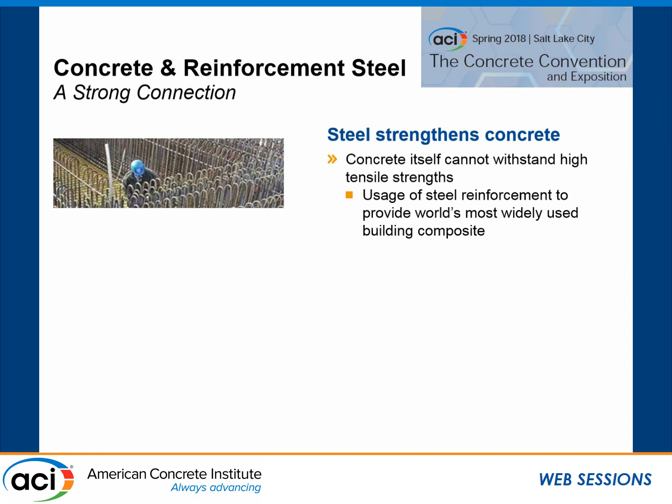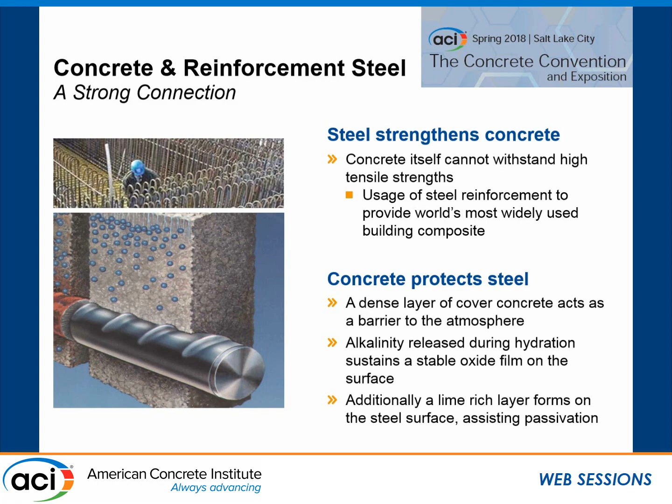Concrete and reinforcement steel have a strong connection. It's a nice synergy. Steel strengthens concrete. Concrete's weak in tension, steel's strong in tension. And in turn, concrete protects the steel. The high pH of concrete creates a passivating layer around steel. Everybody's happy.

Until bad things start to happen. Unfortunately, all steel reinforced concrete is at risk. Steel is just thermodynamically unstable. It is going to rust at some point. You can't change that. You can do a lot of things to prevent it, and the real trick to being successful is to keep it from rusting until you retire.

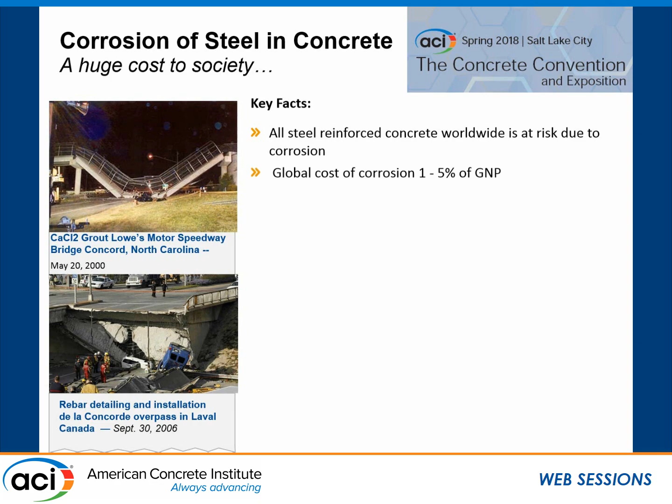Cost is about 1 to 5% of corrosion - that's all types of corrosion, is 1 to 5% of the gross national product of a country. A lot of money. Just of corrosion mitigation in steel, it's estimated to be $1.25 billion.

As long as we reinforce concrete, it's going to rust. You're installing a time bomb. You may be able to do some things to keep it from happening, like impressed current cathodic protection, but eventually the power is going to go off. So natural laws: concrete cracks, steel corrodes.

It's an electrochemical process. The passivation layer, due to the high pH, is actually a corrosion product of the steel. It forms very rapidly. It's just insoluble. And until halide ions - chlorides, bromides, iodides - reach a certain level, that says here 330 parts per million, it's a moving target. It depends on a lot of things.

If pH value falls much below about 10, corrosion will start. It also depends on the oxygen, the temperature, the resistivity of the concrete. What happens? Steel expands when it oxidizes about 4 to 10 times, more or less, the volume. It's in a low tensile strength medium of concrete. That expansion causes cracks. Once concrete cracks, all the properties get compromised in a hurry.

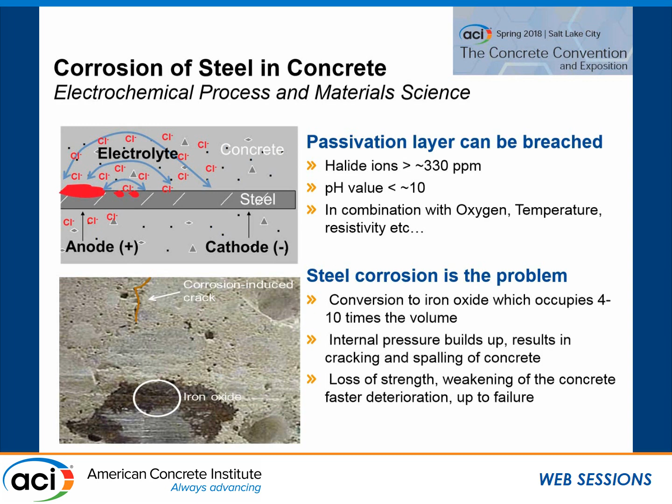Why does corrosion occur? Well, we start out with iron ore. We pump a whole bunch of energy into it in a refining process to turn it into steel. And then Mother Nature wants to turn it back into iron ore through deterioration.

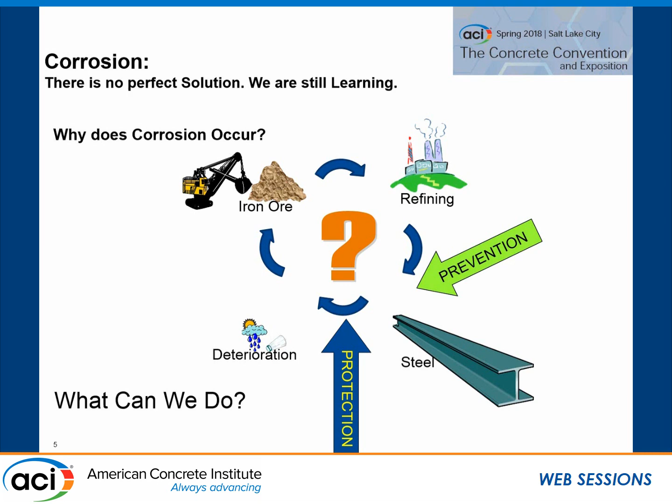So what can we do about it? We can prevent it, change the nature of the steel, replace it with an alternative reinforcement. We can provide protection, creating a barrier between the hostile environment and the steel itself. Or we can try to mitigate corrosion.

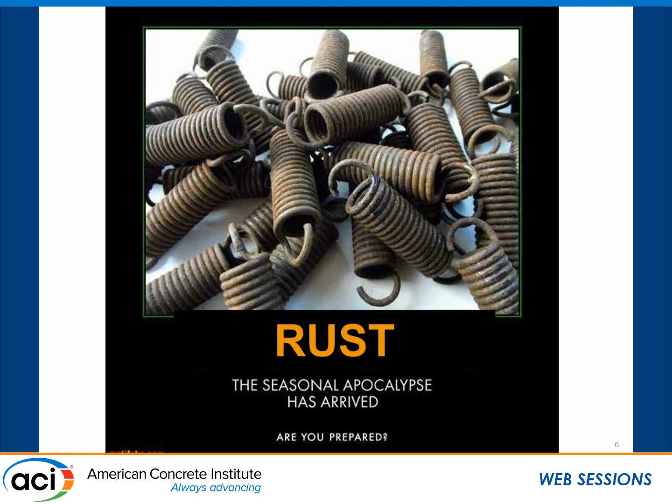However, rust is going to happen, and the seasonal apocalypse is upon us. Spring, we have de-icing salts, we have warming temperatures, we have lots of water. Corrosion management combines 3 really neat things: the economy, the environment, and social responsibility. It is a key component of sustainability.

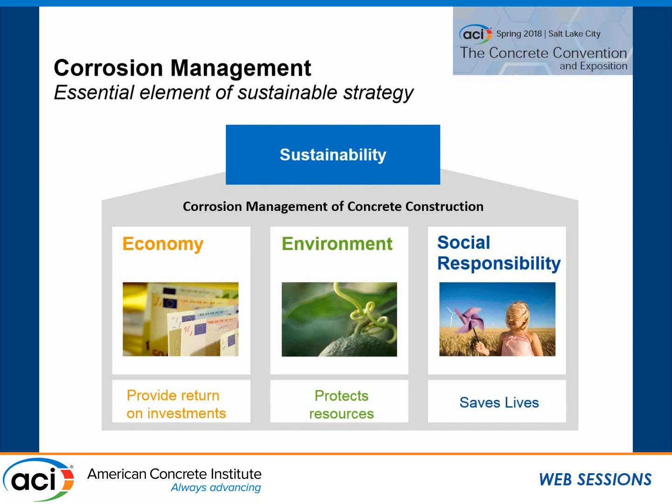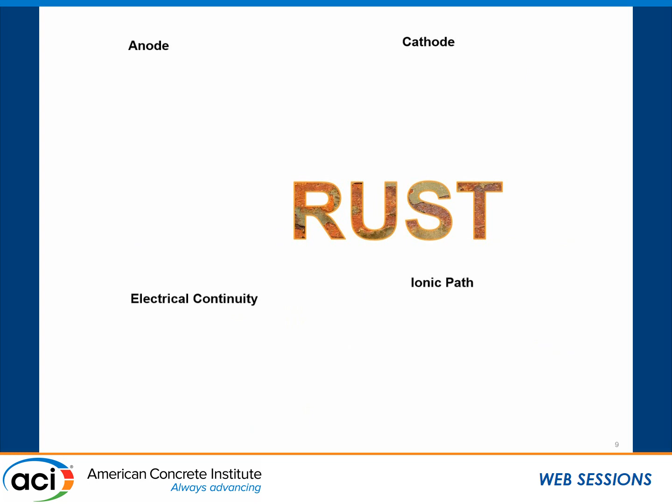For corrosion to occur, we need 4 components. We have to have an anode, a cathode, electrical path for the electrons to flow, and an ionic path for ions to move through the concrete. We can do different things at different points.

For the anode, we can affect the concrete permeability, changing the water cementitious material ratio through pozzolans, chemical additions. We can change the corrosion threshold through inhibitors. We can reduce the reactive surface like with coatings. We can force the opposite reaction with cathodic protection.

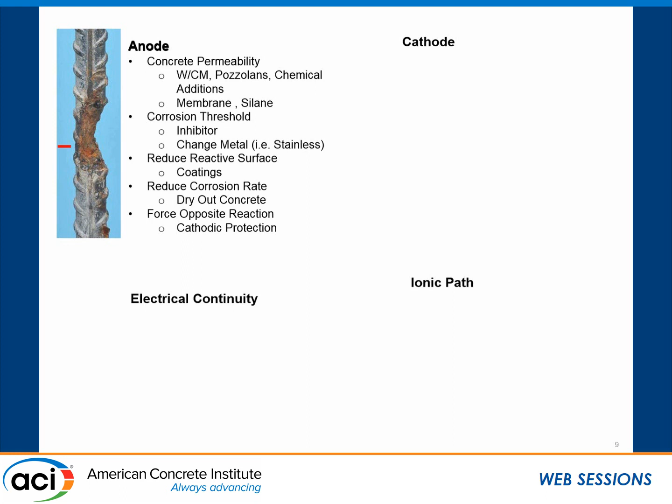At the cathode, we don't really see a whole lot of things happen, but it's still an essential part of the corrosion cell.

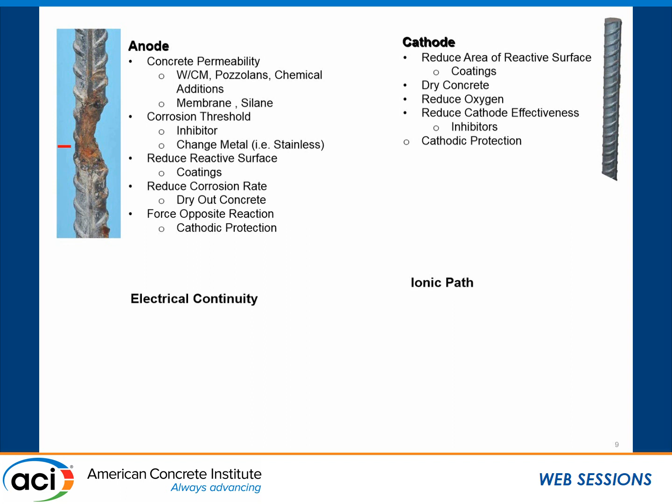Again, we can reduce the active area of the corrosion surface. We can dry out the concrete. We can use inhibitors that are effective at the cathode. And again, cathodic protection. For electrical continuity, we have to disconnect the anode and the cathode. The best example of that is a coating on the reinforcing steel—there's no place for the anode and cathode to form unless that coating gets damaged.

The ionic path, we can change the resistivity of the concrete. This is ions moving through the concrete—supplemental cementitious materials, drying the concrete out. When you think about it, all the deterioration mechanisms in concrete, once I've got the concrete properly cured, if I can keep the water out of concrete, a lot of really good things happen. I don't have alkali aggregate reaction. I don't have sulfate attack. I don't have ingress of chlorides. I don't have corrosion.

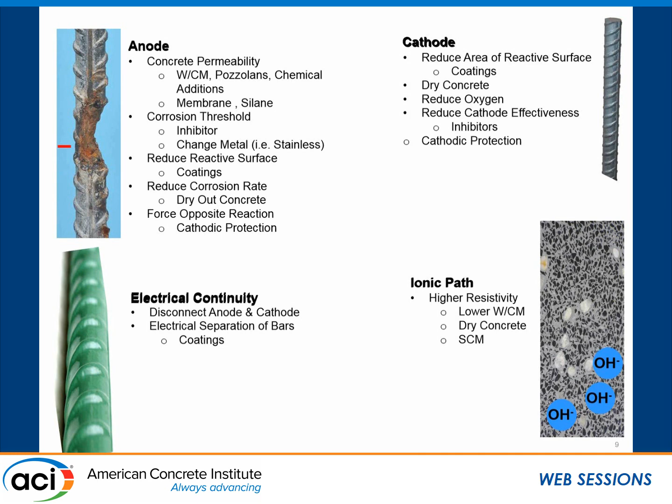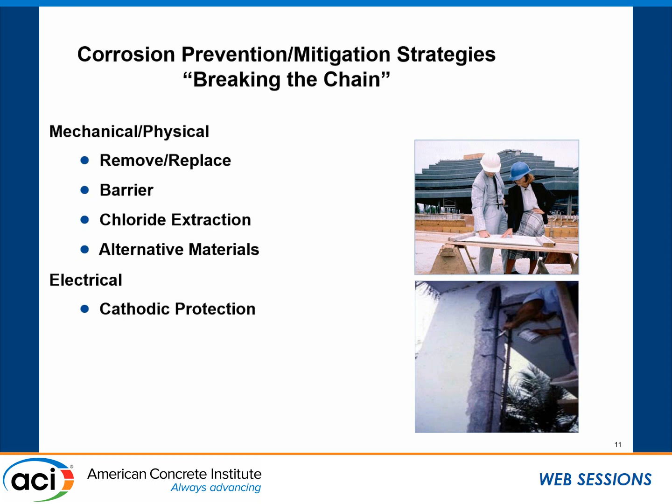So we have to break the chain, either through mechanical or physical means, or through electrical means, or chemical means. In corrosion control technologies, prevention can be alternative reinforcement. I also consider corrosion inhibiting admixtures in concrete a form of prevention. You do it before the corrosion occurs.

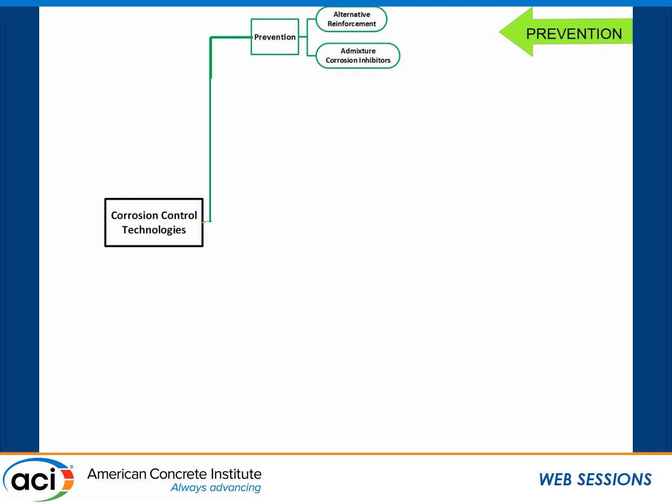You're no longer fighting against Mother Nature as much. It's not an uphill battle. The longer you wait to try to control corrosion, the harder it gets. And unfortunately, concrete's such a great material, we usually let the patient be about ready to die before we do anything about it. Protection: membranes and coatings, penetrating sealers, rebar coatings, increased cover.

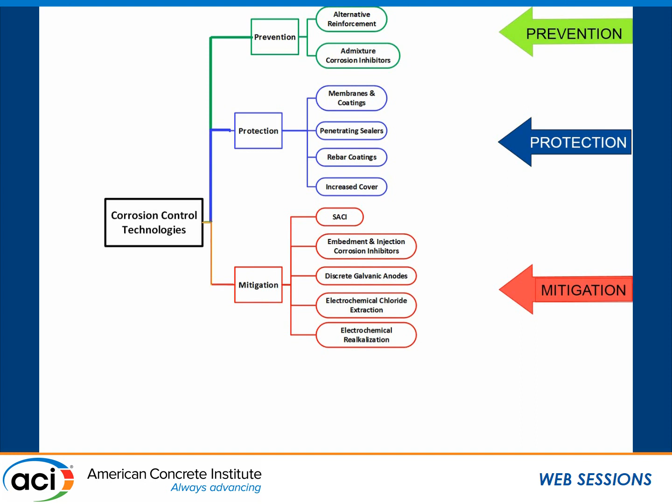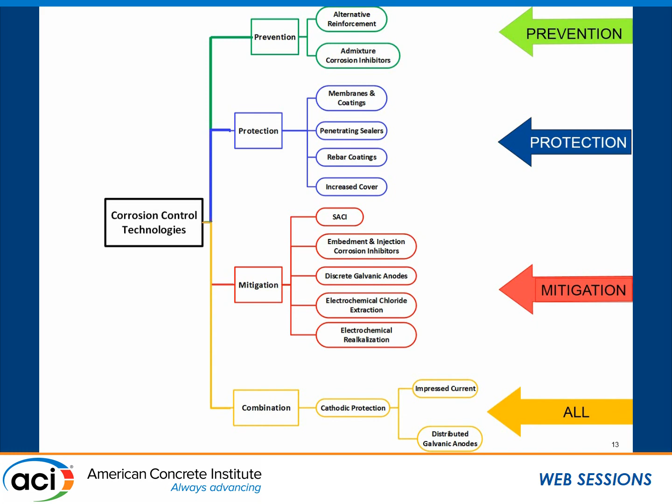And mitigation: surface applied corrosion inhibitors, galvanic anodes, electrochemical chloride extraction, electrochemical realkalization, and other electrochemical means, cathodic protection of impressed current or distributed galvanic anodes. None of these is perfect—that's why we have them all. I'll go through all of them.

Non-corrosive reinforcement—it's really great. It's permanent. It eliminates corrosion. Unfortunately, it costs a lot. Design may be different. It may develop differently, may have different yield strengths. Is it compatible with conventional reinforcing? You get too noble, like try put carbon fiber in contact with steel, it's going to cause the steel to corrode.

What about if I'm using epoxy-coated rebar and I've got pinholes or voids? What about the bond that forms on galvanized rebar? I've got a corrosion product that develops, and that's going to change the way it bonds to the concrete.

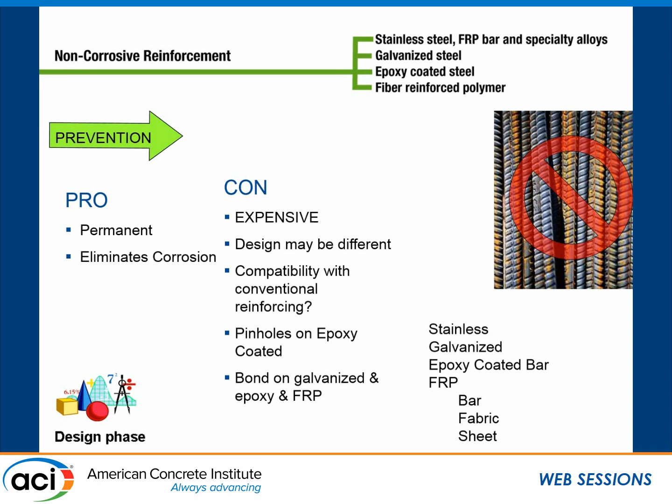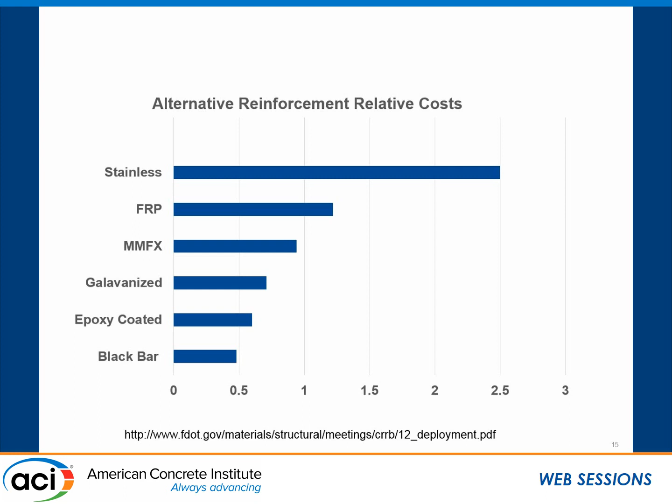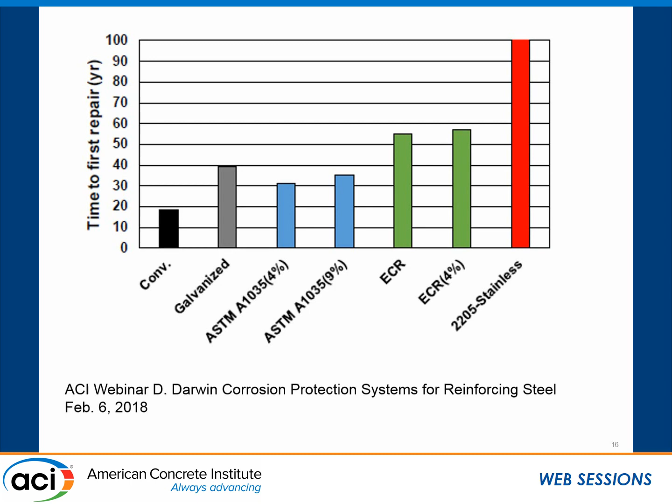Here's one estimate of cost difference, upfront cost. Look at how much more stainless costs—2.5 times more than black bars. But if you look at the time it takes to repair, stainless is over 100 years. Conventional reinforcing, 20 years, and everything in between. Or if you look at the life cycle costs, conventional steel has the highest life cycle cost, and stainless one of the lowest. Epoxy-coated reinforcing in this study also worked very well.

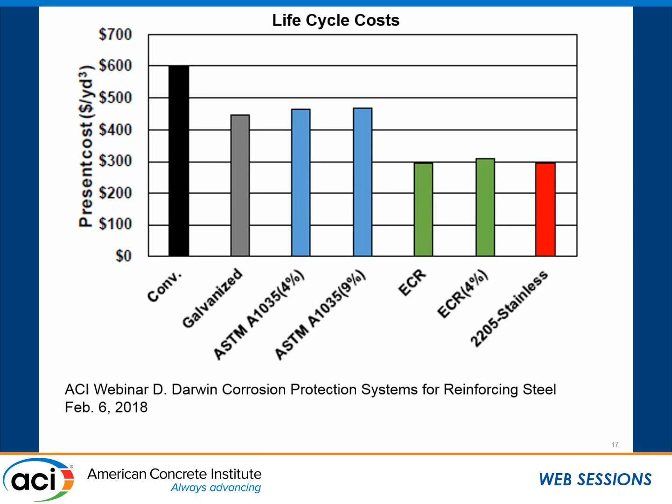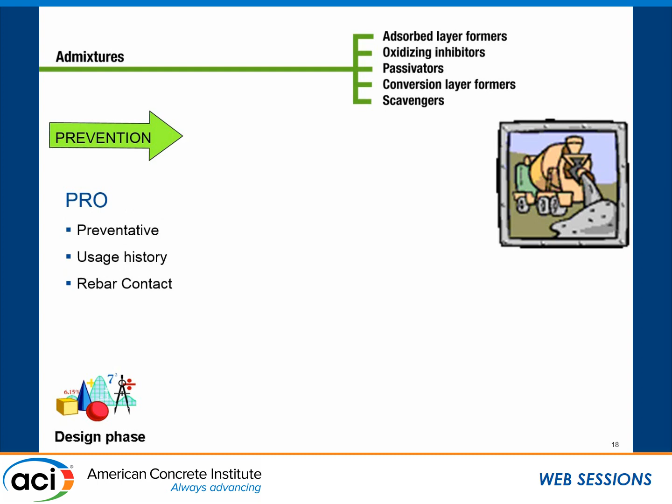Admixtures—there's a lot of different kinds. I've been playing around with cement and concrete chemistry for most of my career. We can come up with a lot of theories about how and why things work, but they're theories. Anything you do to try to analyze what's going on in concrete changes what you're looking for. Admixtures are preventative, they have a usage history, and they are in intimate contact with the reinforcing steel. However, do they stay in the concrete where you want them? Do they leach out? How do I verify the dosage?

Trust the ready mix supplier, I guess. What about dispersion verification—did they all get mixed in the way they should? Many of them are concentration dependent. That is, do I have enough of the stuff in there to really do me any good? Do they get consumed during their inhibition operation, such as nitrites? And they're proprietary—us material suppliers don't really tell you a whole lot of what they are sometimes. There's organic and there's inorganic inhibitors.

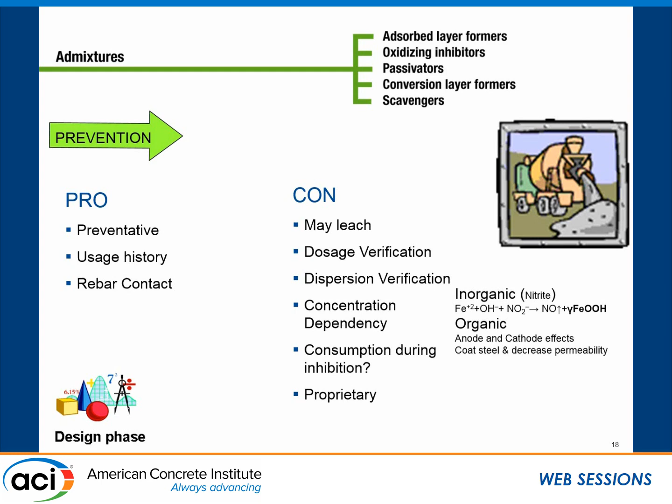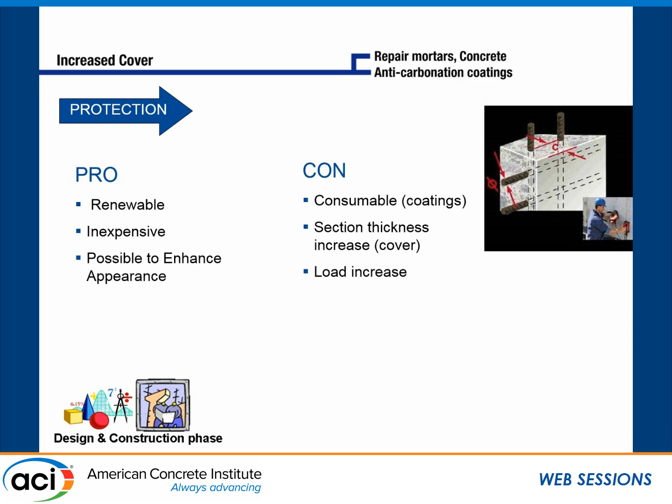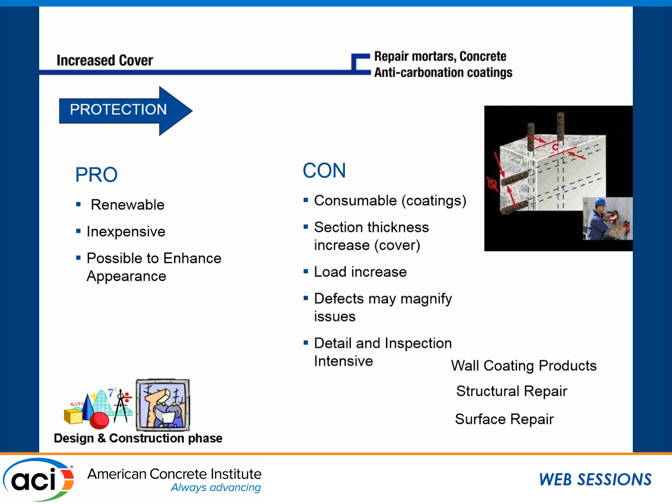I paint the wall. Downsides: they're consumable, it doesn't last forever, such as for coatings. I do increase section thickness, I can increase the load. The defects—if I have defects in my protective system, I can actually make the problem worse. And it's detail and inspection intensive. Examples of this: wall coating products, structural repair, surface repair.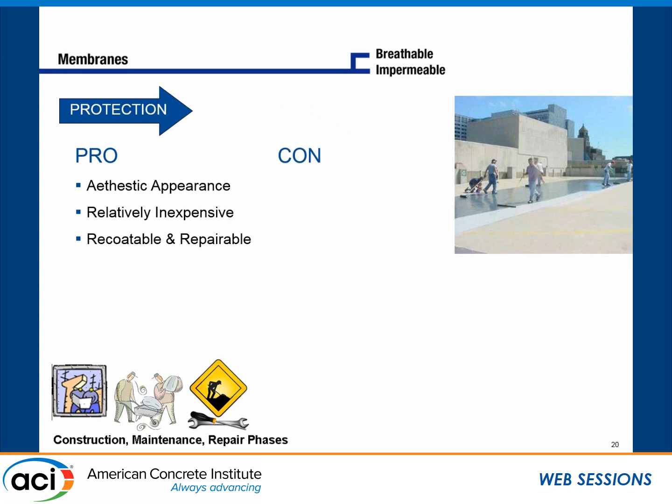Membranes. I can improve the aesthetic appearance of a structure. They're relatively inexpensive compared to replacing the structure. They have a fairly long life. They can be recoatable and repairable. The downside: many of the membranes are reactive chemistries. They require a dry substrate—how dry is the concrete? They require surface preparation, that increases the cost. They are maintenance areas—I have to keep them intact.

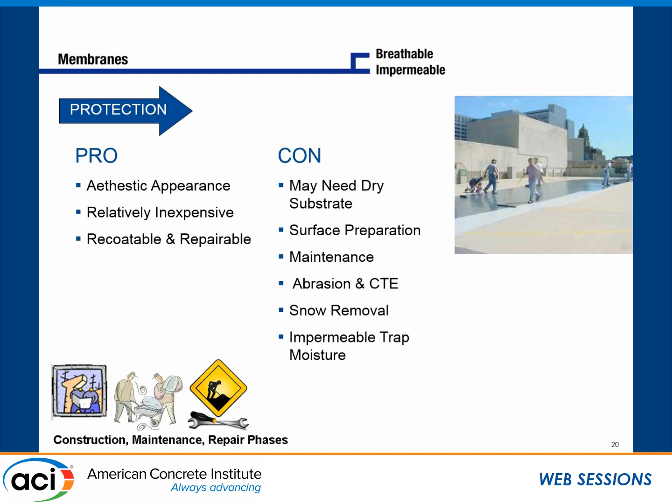Abrasion and coefficient of thermal expansion differences may affect them, but snow plows are the biggest damager. A snow plow scrapes off the membrane, now you've got holes, de-icing salts getting in. They may also trap moisture because they're impermeable, fill the concrete up with water and let it freeze, and bad things happen. I've got total saturation, my air void structure may wind up not being effective.

Reinforcement coatings can be applied in the field. They're fairly low cost, pretty mature technology. Some claim to be bonding agents. My personal opinion, even though we sell them, is hard to beat.

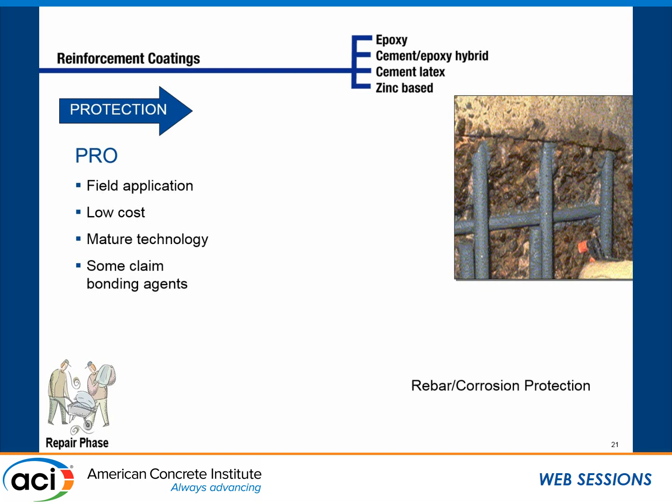Just a good scrub coat: have proper surface preparation, take your repair material, mix it to the consistency you'll use, scrub it into the substrate, take the aggregate that doesn't fit in there, get rid of it, and now place your repair material before it dries out.

The downside of reinforcement coatings: how do I get them underneath the steel? It's real hard to reach there. What about pinholes? What's their bond to concrete window? The longest I know of a bonding agent lasting is maybe 24 hours.

The studies I've seen on our products and other people's show you start out pretty good, but the longer you leave it open, the worse it gets, and after 24 hours, not so good. There's continuity of the coating, and their rate of hardening depends on the environment, since their chemical hydration reactions for setting up don't work so well in cold conditions.

Do they do anything about the incipient anode, the ring anode, the halo effect? That's where the concrete steel that was corroding was the anode of the corrosion cell, and right outside where it was corroding is the cathode. But I don't see anything happening at the cathode.

So I excavate out the hardened concrete, I fill the hole where the anode was, that makes that cathodic, and it moves the anode to right outside the repair. By making it more cathodic, I may make it worse.

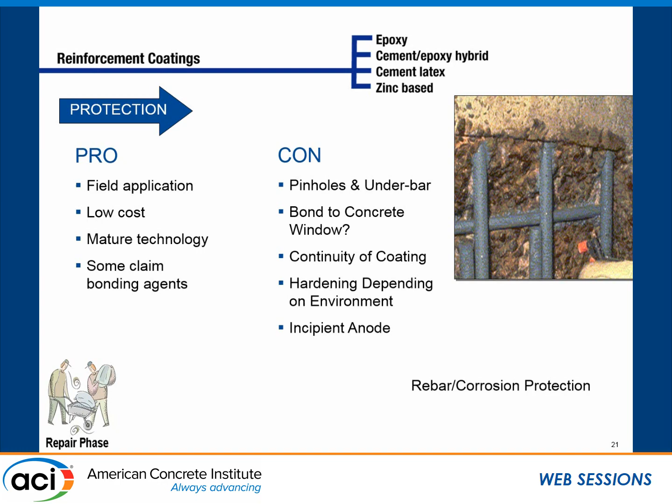Penetrating sealers, my opinion: silanes are one of the biggest bangs for the buck you can do for the good of concrete, because they dry it out. They're renewable, they're inexpensive, they don't change the appearance, and I can teach the dumbest guy on your crew how to apply these things in about 30 minutes.

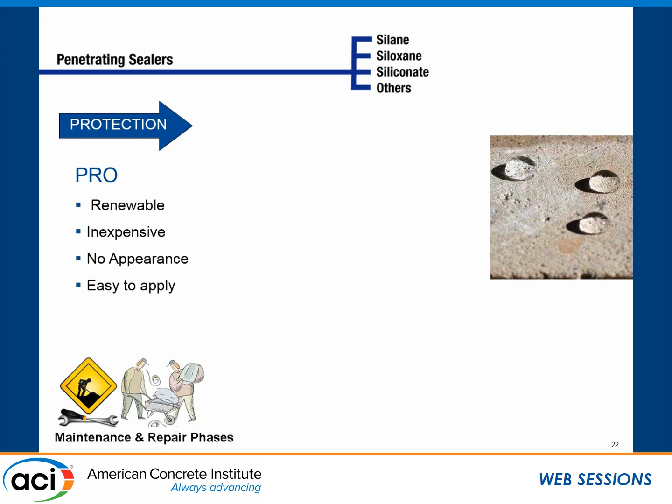They're easy to apply, and it's hard to screw it up. Keep it off the vegetation, keep it off the windows of the cars. That's about all you got to do. And they do repel water.

However, they're consumable. Nobody can really tell me why they go away, we just know that they do eventually. So that creates a maintenance situation: when do I reapply it, and how do I monitor their effectiveness?

They don't do well against high hydrostatic pressure, so I can overwhelm that hydrophobic effect, such as in immersion situations. How wide a crack will they bridge? Not very wide. And many of them are solvent-based.

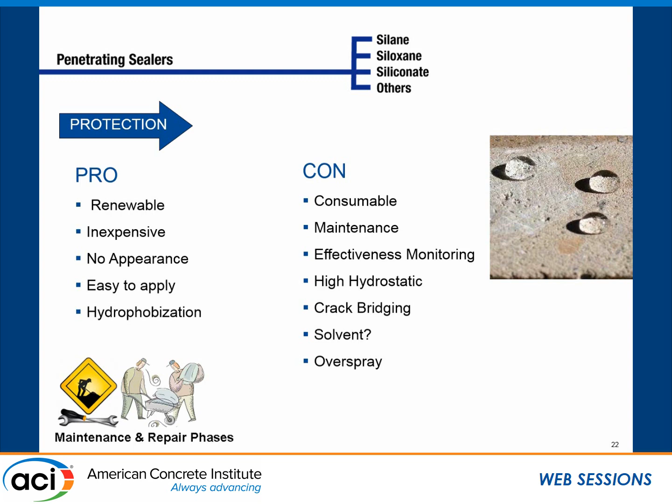All of the silanes and siloxanes, as they react, generate VOCs, volatile organic compounds, most of which are alcohols. So it smells like vodka when you apply it. Just don't smoke when you do. And overspray, like I said, plants don't play nice with silanes. We also call them water repellents.

Surface applied corrosion inhibitors, a very controversial topic. They're renewable, they're fairly inexpensive, they don't really change the appearance, they're easy to apply. It works by magic, they're inhibiting, they're not solving the problem. They may slow it down, they may not.

Your choice is, if I have a lot of corrosion going on and I use one of these, it's easier to apply than ripping out the concrete and doing more invasive procedures. It may help, it may not.

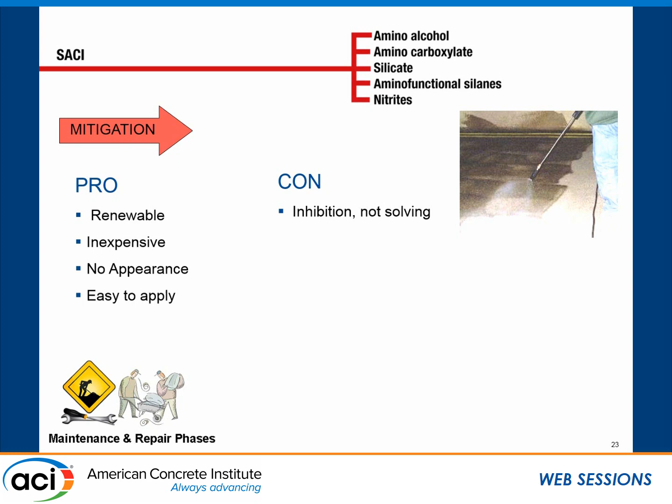How do I monitor their effectiveness? How deep do they penetrate, and at what rate do they penetrate? What about the residue left behind? Some of them do leave a residue and can inhibit bond, some of them don't seem to harm bond. You have to test it and see.

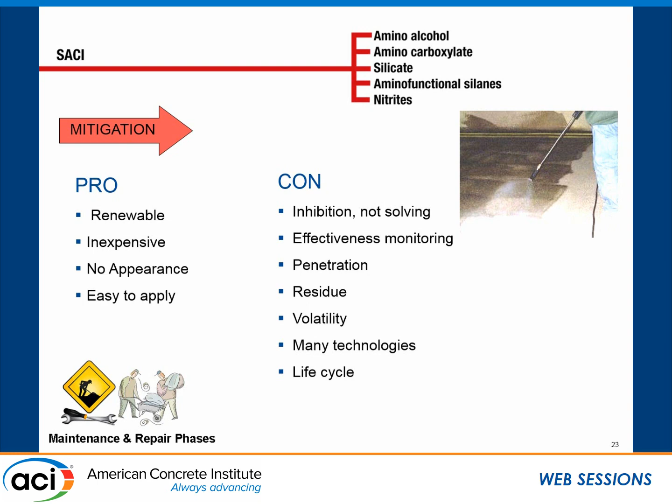Their volatility: if I have a vapor phase corrosion inhibitor, it moves in a gaseous phase. Does it move into the concrete or out of the concrete? Probably a little bit of both. There are many different technologies, again they're proprietary, we don't tell you what they are, just trust us, they work. And what's their life cycle? Galvanic anodes, two real kinds.

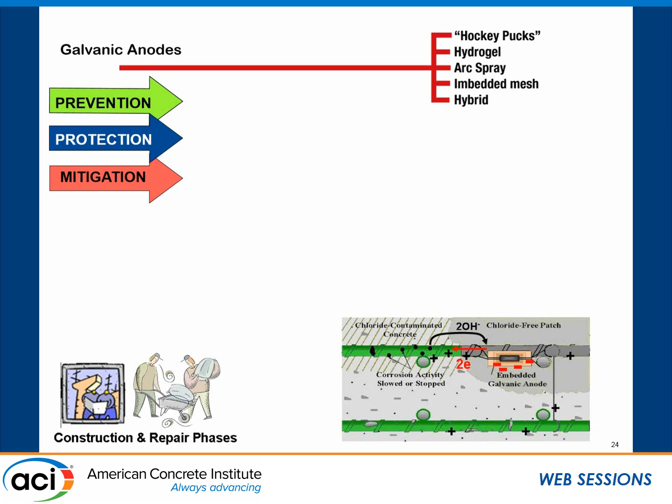There's discrete and there's distributed. These work like galvanizing on steel. The zinc corrodes preferentially, the zinc is the anode, and the steel becomes the cathode. They're really an electrochemical method.

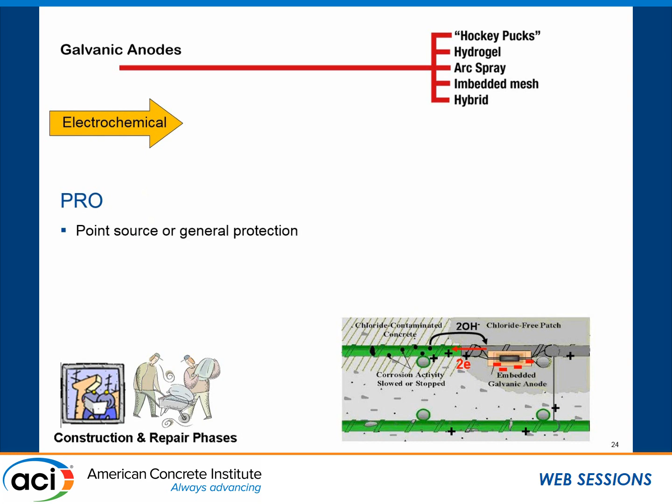Their advantage: they're a point source, or the distributed ones can be general protection. They follow the corrosion activity, so it's self-regulating. They don't require an external power supply. As the corrosion of the steel wants to increase, the corrosion rate of the galvanic anode increases to keep up with it, if it's properly designed.

I can monitor their effectiveness, but I have to design it that way when I install them so I can monitor the corrosion current. So you have the anode, and you have a junction box, and a wire from the steel to the junction box, a wire from the anode to the junction box. You join them in the junction box. Now I can do some monitoring.

Otherwise, I really can't. And the discrete anodes, the little hockey pucks or the small ones, do a good job from everything we've seen at inhibiting the ring anode, the incipient anode effect. And they're self-powered. They're consumable. I've got something that's going to corrode away, and eventually it will wear out.

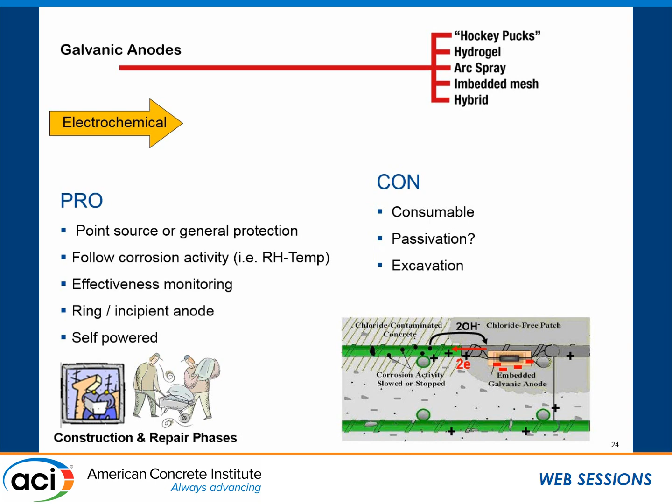Do they passivate? In that chemical environment, you have to put some stuff in there to keep them active, but often that stuff you're putting in there may wind up leaving corrosive material behind when the zinc's gone. They attract chlorides as they corrode. And I have to excavate to install them.

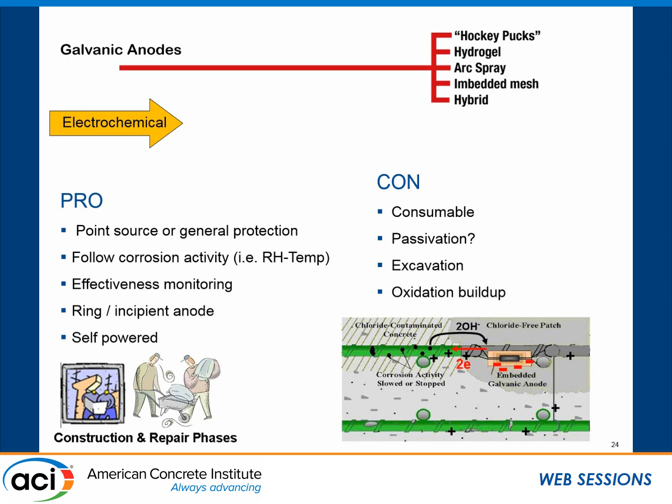And oxidation buildup. However, with things like arc spray, flame deposited zinc on the surface, that's pretty cool technology. It changes the appearance. I have to have dry concrete, and it's some pretty specialized equipment, but it's been pretty effective.

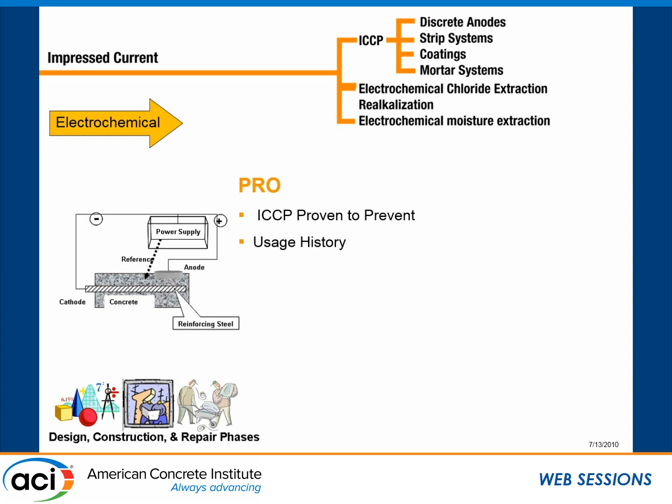Impressed current cathodic protection - you take a course at NACE, they're all over this. They love impressed current cathodic protection. It works. It's got a long usage history. A lot of different systems, a lot of different designs. Downside, really expensive. It's got to be designed, installed, maintained, and monitored correctly. You don't do any of those four steps, you're screwed.

Pardon my language. You have to have continuity of the reinforcement. So if I hook up one of these systems and I don't have all the steel connected, guess what? I just forced the steel that ain't connected to rust like crazy. You'll find out in a hurry.

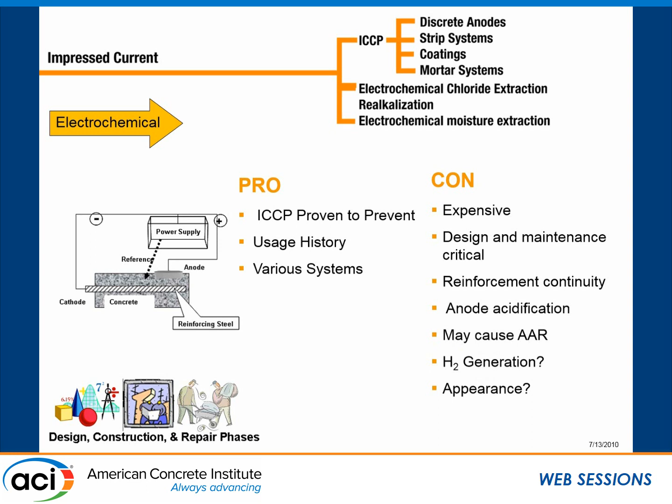And if I crank it up too high, I generate acid at the anodes and I destroy the concrete. If I crank it up too high, I may also kick off alkali aggregate reaction. And if I turn it up too high, I may generate hydrogen. And if I've got post-tensioning or pre-stressing around, you don't want hydrogen. It makes it brittle, and you don't want brittle in that stuff. And it changes the appearance.

So anyhow, the best thing I can tell you about corrosion: follow good trade practices, such as the Manual of Concrete Practice from ACI. I love this acronym DDAS. Don't do anything stupid.

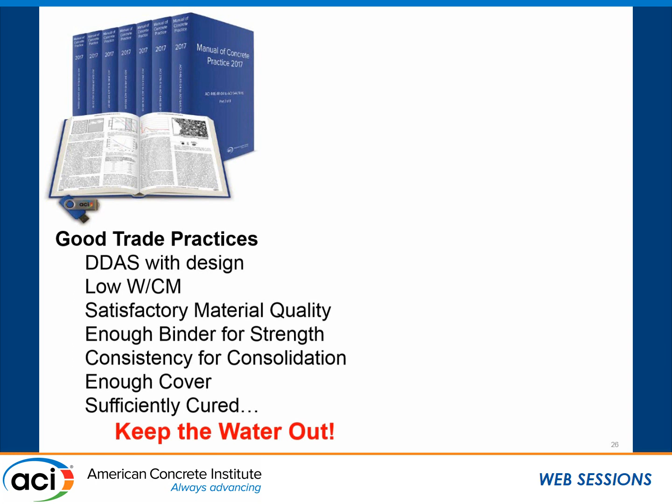Use a relatively low water to cementitious material ratio. And I say cementitious material ratio, I like pozzolans - they do good things. Have satisfactory material quality, enough binder for strength, consistency for consolidation, enough cover, cure the concrete well. And after that, keep the water out.

On the other hand, entropy - you're fighting against Mother Nature. The steel's going to want to rust. So it's not so much about letting it go as submitting to the inevitable.

Concrete maintenance. We ignore concrete once it's cast, but it really should be maintained. You buy a car, it comes with a maintenance manual. One of the most controversial things in the 562 repair code is a requirement to have a maintenance program provided. You have to verify that the repairs you have installed are working. You have to inspect that things were done correctly.

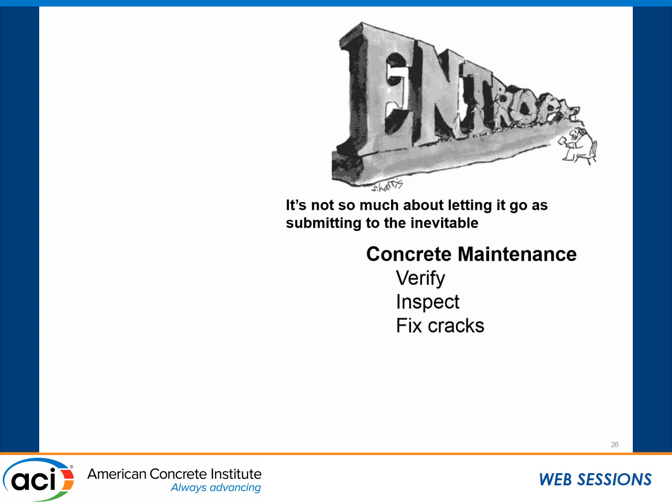As soon as you got a crack, fix the crack. The longer the crack's there, it ain't going to get better. Yeah, you heard about autogenous healing and fancy bacteria and fungus that'll deposit stuff. Ain't there yet, ain't ready for prime time. You got a crack, fill it with something, keep the water out. And don't delay, because the problems get worse.

So that concludes my presentation.

You see my hair getting gray and my baldness appearing. I'm now an old guy. And I didn't bring the Tony Murray tan turtleneck. But yes, I did. Thank you very much.